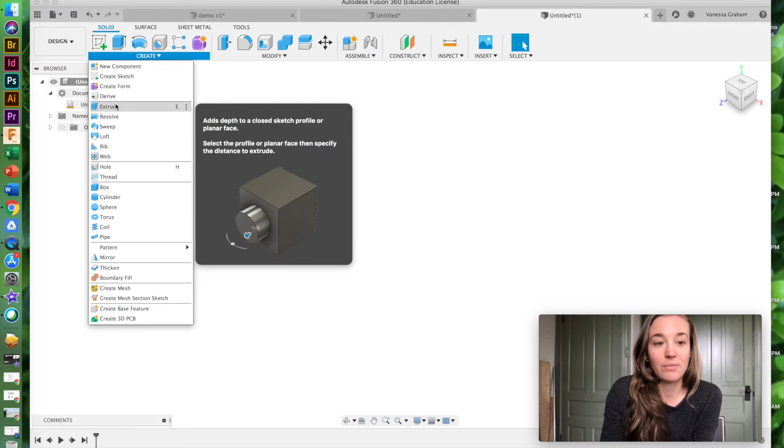With that being said, we're going to start. We're going to create a sketch rather than using one of our primitive shapes. We're going to create a sketch. Also, my shortcut is right there. Now I have to pick which plane I want to make a sketch on, and I'm going to be eventually modeling vertically, so one of these two planes, doesn't matter which one.

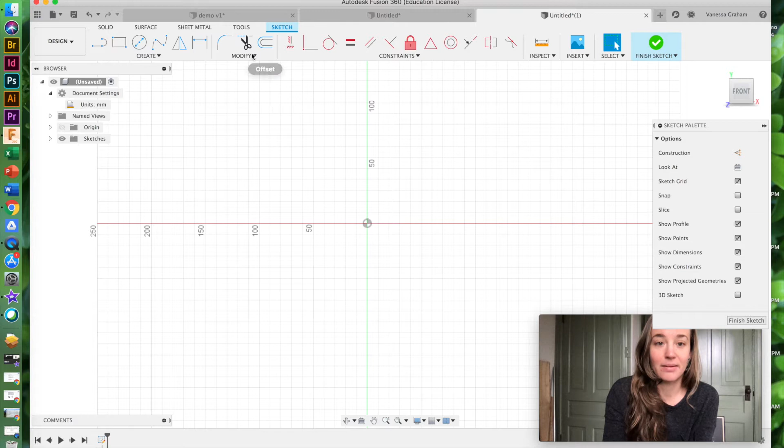And before I start my sketch, I want to go ahead and set my parameters. So for a model of a ring, we're just going to be setting two parameters. The first will be your ring size. So if you model this for yourself and then your mom wanted one, you could readjust your model for her size as well. So yeah, another benefit of parameters.

If you haven't already, go ahead and watch the little how-to video on how to determine your ring size. That is going to tell you what size finger you have, and then from that information we can find out what the diameter of that specific ring size is. So go ahead and watch that video, and then you'll be able to figure out what value you're putting in here.

I'm going to be putting in 17 just as kind of a guesstimate. I guess I can look real quick. Oh, wrong.

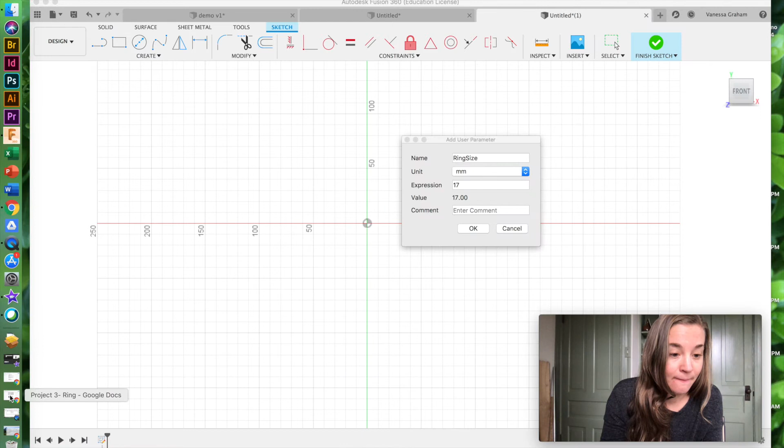If I am a size 7, that's 17.3. So I'm going to put 17.3 right there as my parameter value, that's my ring size. I'm also going to put in thickness, which refers to the thickness of my wall. In this model, it's how much it comes off your finger right there.

So I'll add in my thickness parameter by clicking this plus button. I'm going to name it thickness, and my expression will be based on this: I generally, especially if I'm printing these, want it to be between 1 and 2 millimeters. If you're printing in plastic, you want it a bit thicker for better quality print. So this will be my ring size plus whatever I want the thickness of my ring to be, so 1.7 millimeters.

So you can see that outer diameter circle right here is set in my parameters to be whatever my ring size is, plus 1.7. That way I always maintain that thickness.

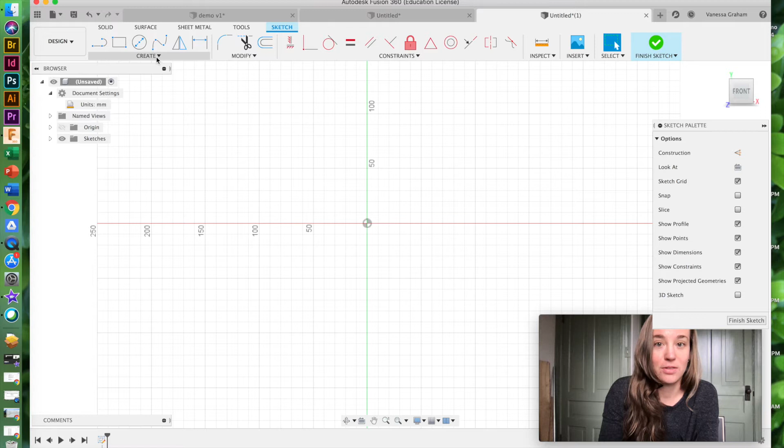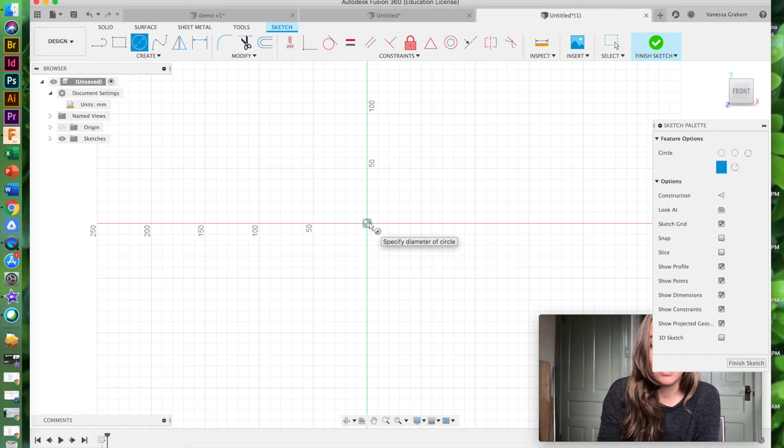So we're going to start with my interior diameter, which is my ring size. Oh, I didn't really mention what I'm doing here. Okay, undo. Didn't undo. There we go.

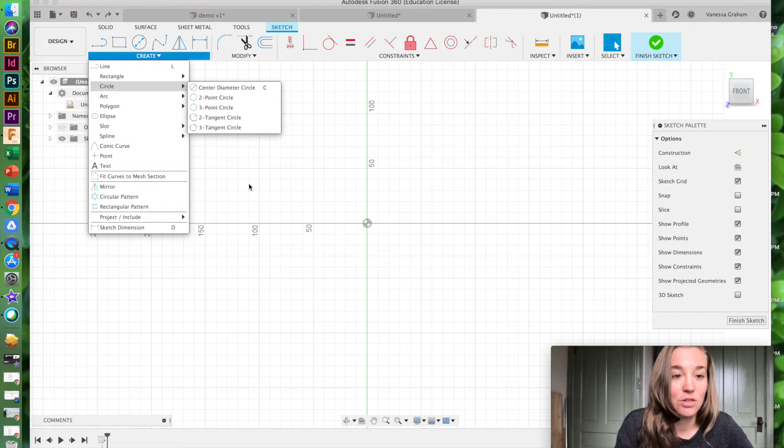So I'm going to go to my create menu up here and choose a circle. I have various types of circles. When working in my sketch environment, especially when modeling parametrically, it's best if I'm modeling directly off my origin point, so I can keep things aligned perfectly, especially if I'm sketching in multiple planes.

So I'm going to choose a center diameter circle, choose the origin as my center point, drag out, and then I could type in my ring size right there, but I want to set it to my parameter, ring size. Oh sorry, my computer fan's turned on again.

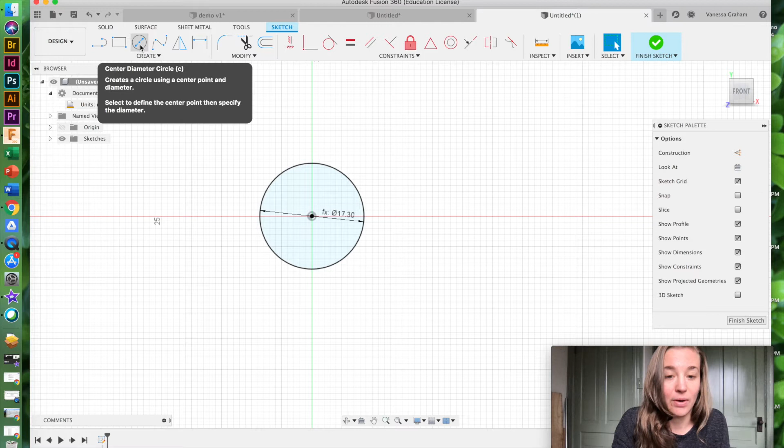Okay, and then I'm going to repeat that process, center diameter circle, which my shortcut is right up there for center diameter circle. Again, starting at my origin, dragging out, and there I wanted to type in my thickness. So now I have the sketch for this line and that outer diameter as well.

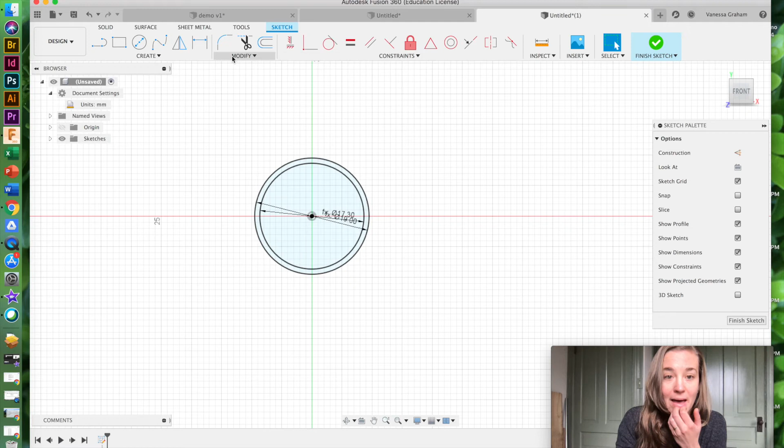Just to show you how parameters work, if I decided my ring size is bigger, like 17.3, you can see that it's completely adjusted my model for me. So again, super helpful. What was it? 17.1? Okay.

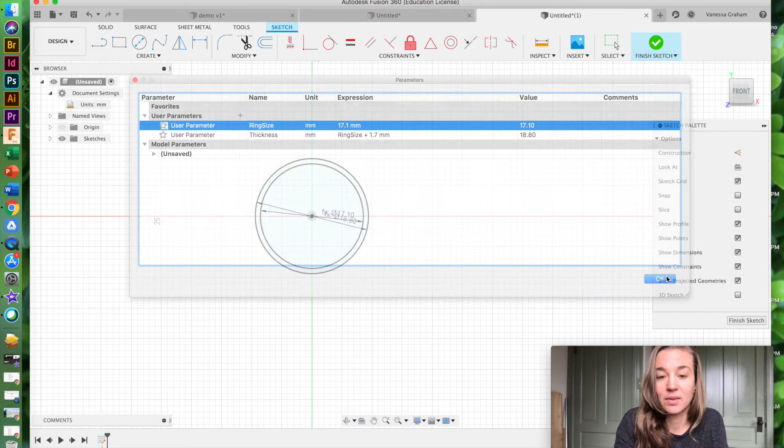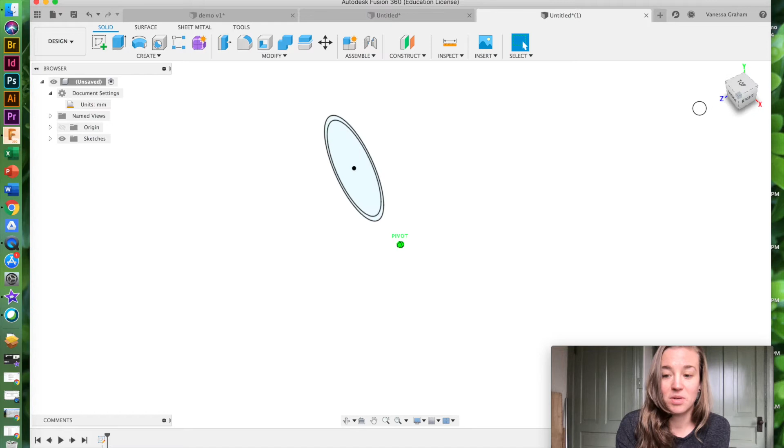So we're going to stop the sketch to exit out of my sketch environment by hitting that check mark, finish sketch, and now I'm back in my modeling environment. So this is what you're used to, all these tools up here, and you can see I have a flat two-dimensional sketch. So from the sketch I can make a three-dimensional object, make this ring.

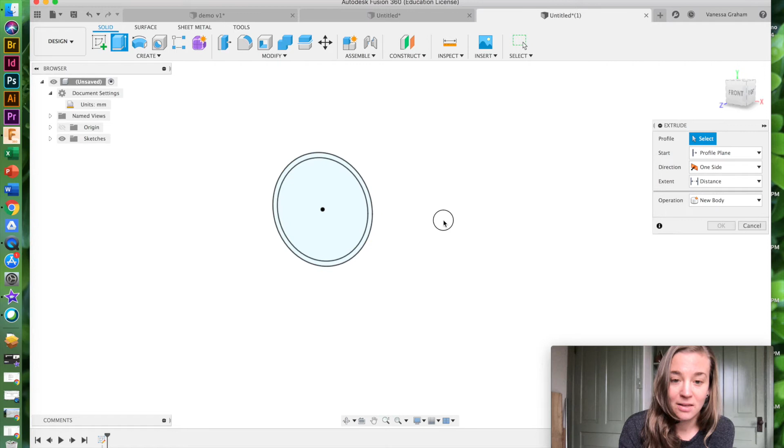By using my extrude command. Extrude will just add depth to a plane or a face, which is what this is. So I want to select the ring, not the interior, but that little section, and then I can go ahead and pull it out and extrude it as wide as I want my ring to be.

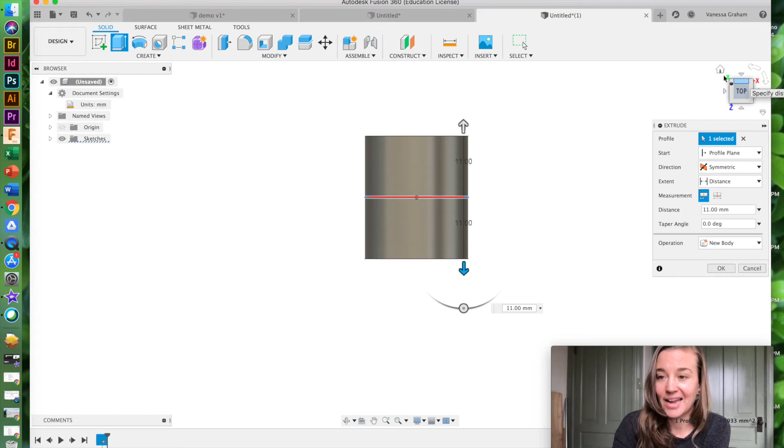Right now it's set to extrude in one direction. I'm going to change that to symmetrically so it stays lined up on that axis perfectly instead of jutting off to one side only. Right now it's extruding 11 millimeters in both directions, which is pretty extreme. I'm going to do 3 in both directions, which creates a 6mm wide ring, which is still fairly wide.

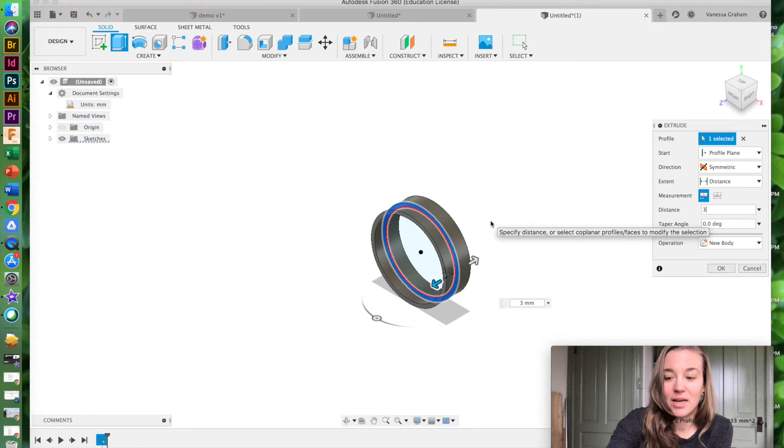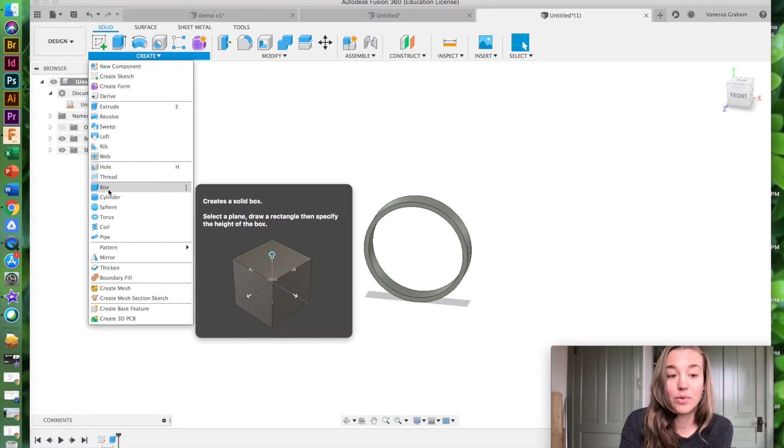That's kind of more of a men's size. If I wanted to do a thinner woman's ring, like 3mm, I could type in 1.5. Okay, so there I have my ring. From here, I can do a whole variety of different things. If I wanted to, I could really just continue using my primitive geometries, adding boxes, cylinders, spheres.

But I want to show you a couple more things in my sketch environment. So I can always edit the sketch if I want to, right-clicking, edit sketch. You will also notice I have a new folder right there, sketches. So as I create multiple sketches, they'll populate in the sketch folder.

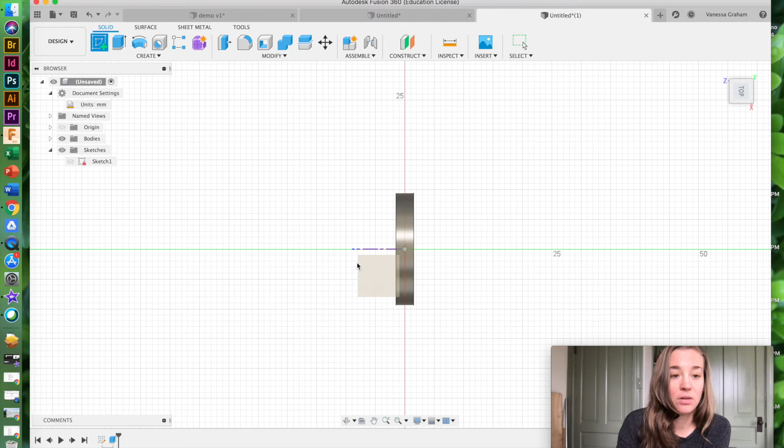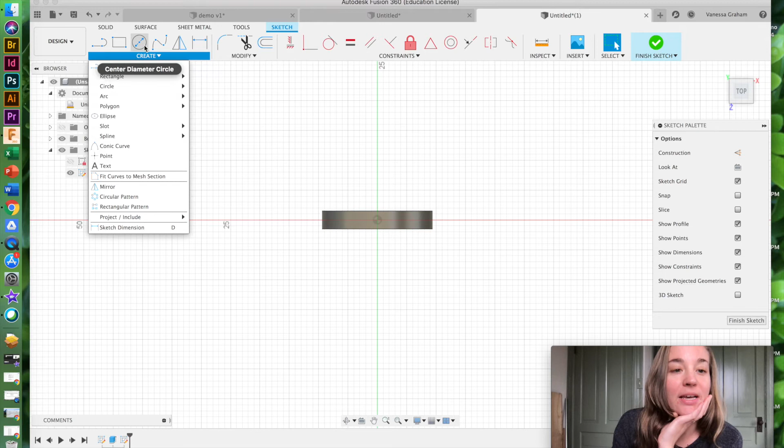I'm going to go ahead and create a new sketch and do it from my top view because I'm kind of wanting to create something to put on top of this. Actually, yeah. Okay, I'll show you a couple other tools we have in our create menu. So far we sketched a circle, but we also have the option to sketch rectangles. We can do arcs. We can do ellipses. Maybe I'll do an ellipse.

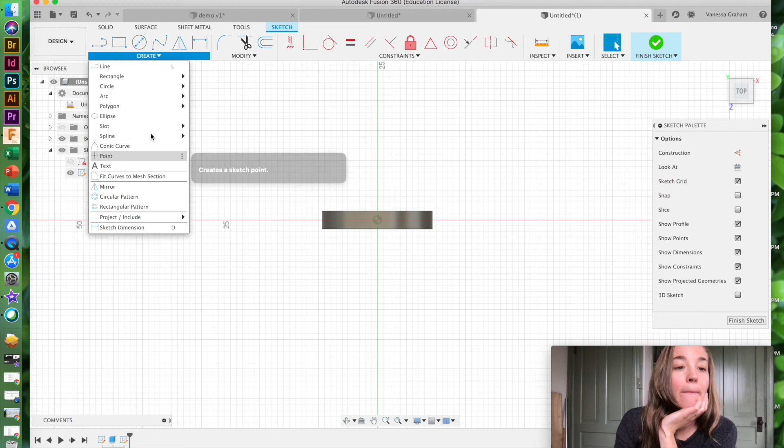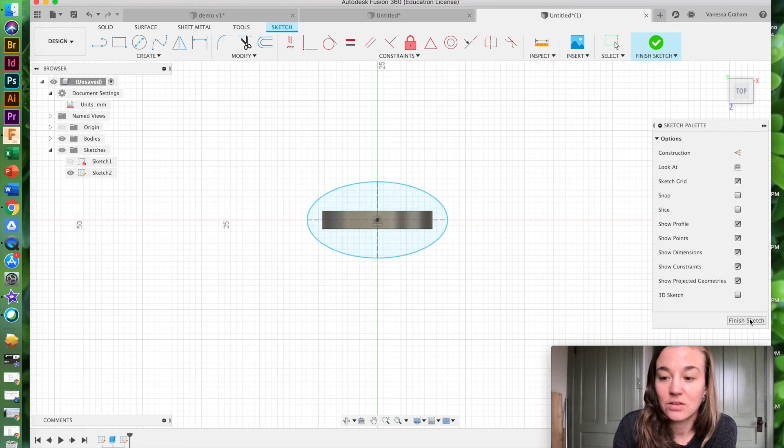A spline will let me create a more curved line, as you can see right there. Let's do an ellipse. Center point. Drag out, and now I can kind of create, you can see this in the video, but this is kind of the top-down view. So this is going to be kind of what I want it to look like. So it's kind of a giant, big old thing on the top of your finger. This is a larger ring. Let's just say finish sketch.

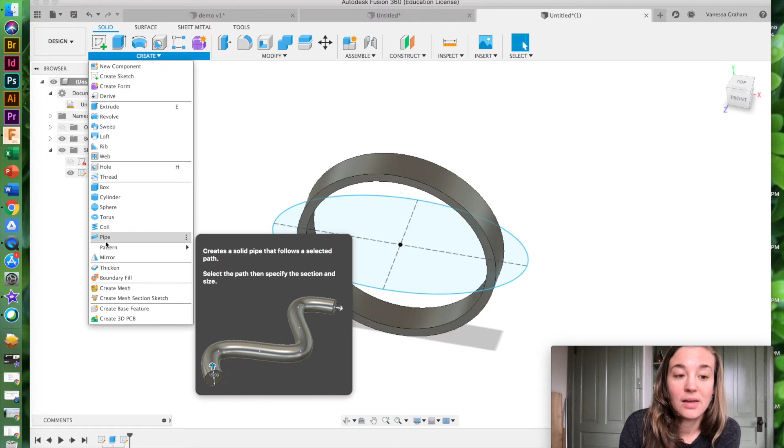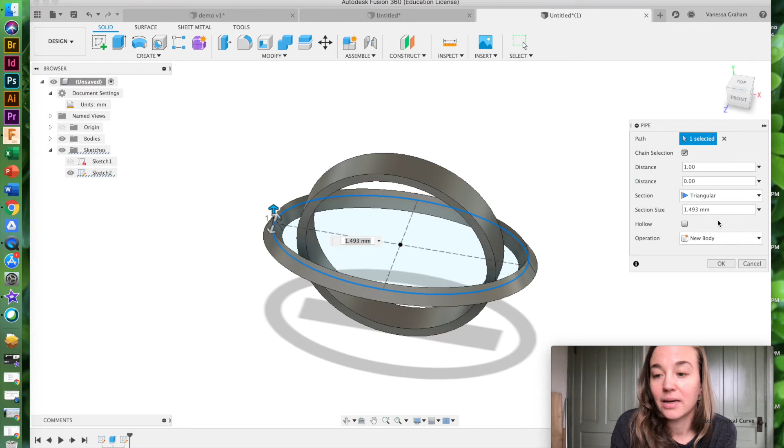So that is within my midpoint line, and I have a couple options here. I didn't really show you guys how to use the pipe tool, but this is a really good point to use it because it follows a path, and this sketch line I've created is a path. So if I wanted to create a pipe around that ellipse, I could do that, and I can create a triangular type of a pipe or square pipe, whatever I really want to.

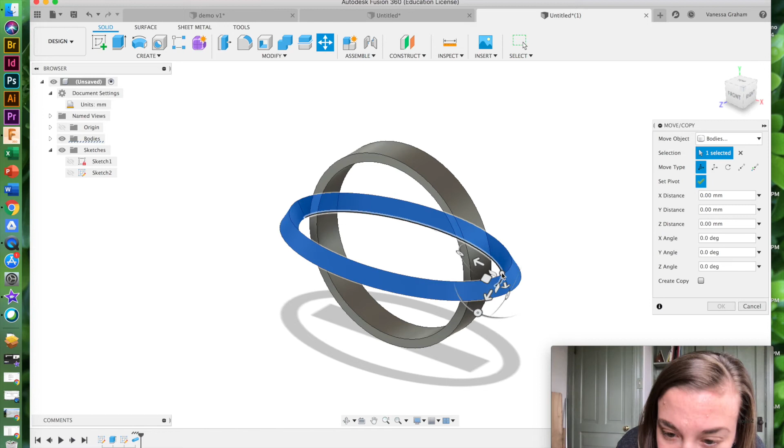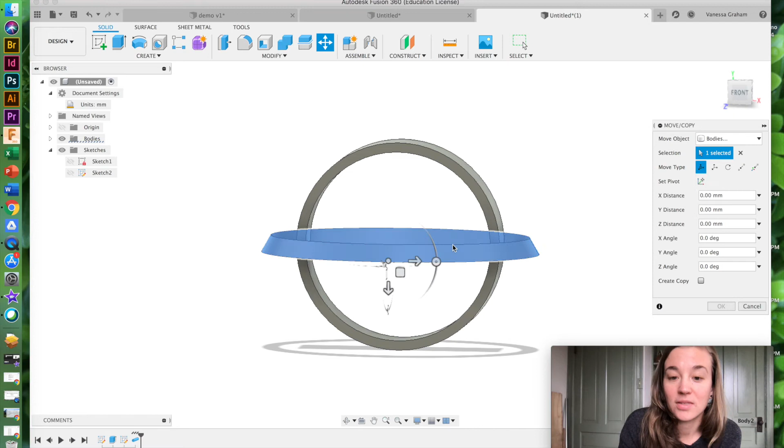I'll move this, but I do want to make sure my pivot is set in a location where I can pull it straight up and down. What if I put it on the bottom? See where that is. Yes, okay. When I move my pivot, I need to hit this green arrow or check mark to set it. Now I can pull that straight up, so it's going to be something that's sitting on the top of my ring. Hit OK. You can notice my sketch is turned off, but it's still there, so I can still do something with it.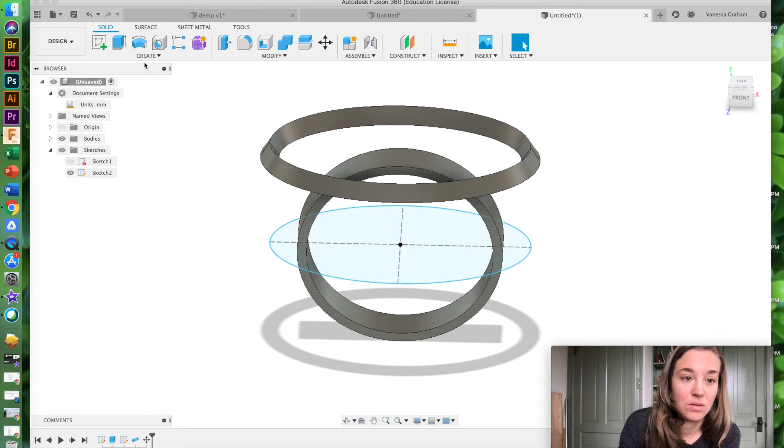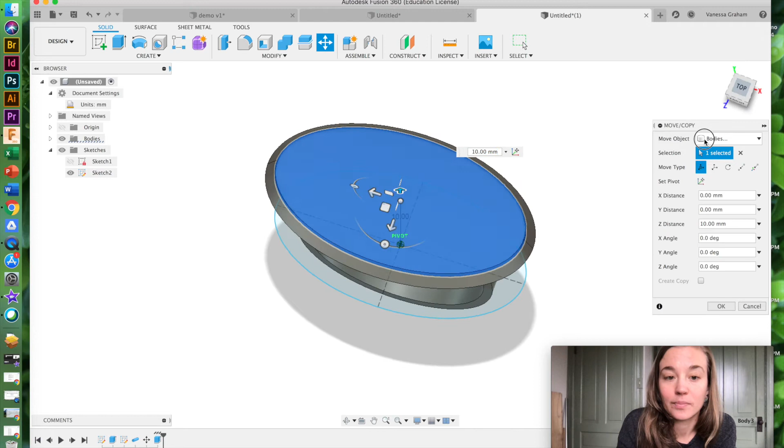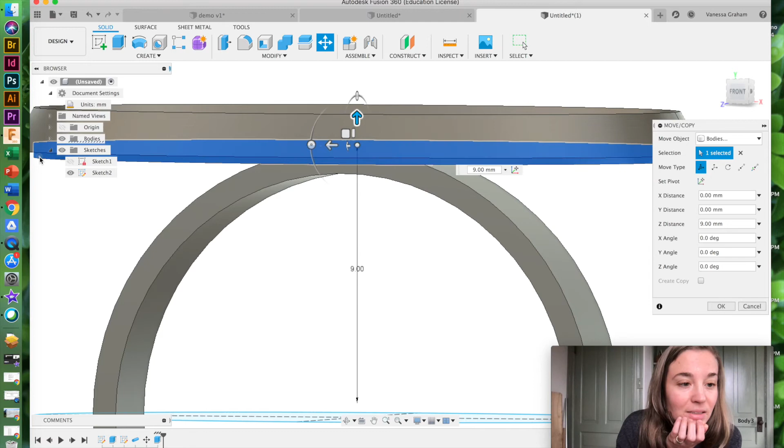If I wanted to make kind of a flat base for this pipe, I can extrude my sketch again. Right now it's set to cut, but I can make a new body with it. Maybe something thinner, 1/2 millimeter. And then I can move that up as well, to kind of fit within there. It's gonna bother me that it doesn't reach this exterior edge right there. Let's see, first I would like it to line up with the bottom. You can see it's overhanging a bit. My zoom isn't working. There it goes. So what's 9.5? What's 9.2? That's good. Okay. I guess it fits right in there. Yeah, okay, I'm happy with that.

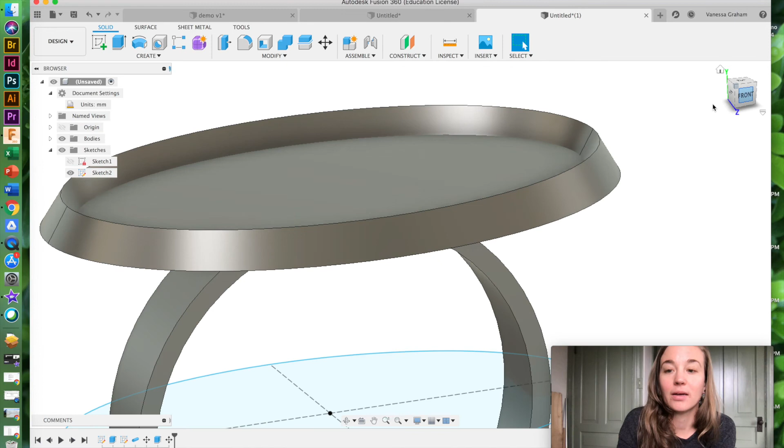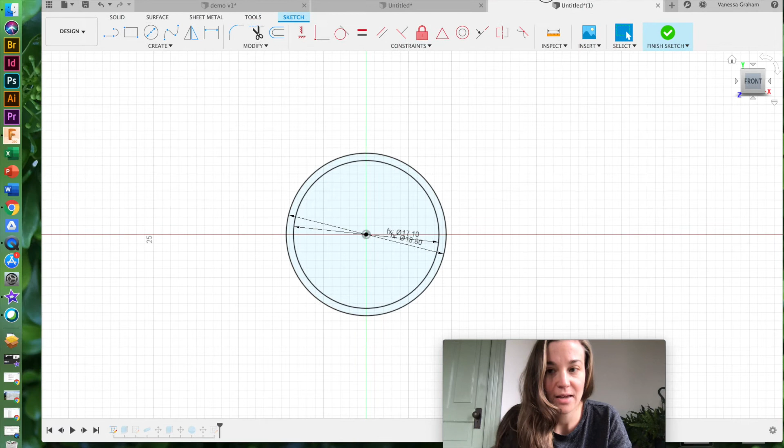So that previous section was all just about how to make a plain normal ring with stuff added on top, but I can also make a ring that is not your typical, it's not the consistent thickness the whole way around the way that this one is. So I want to show you how to do that. I went back in my first initial sketch right there, right clicked, and now I'm editing that.

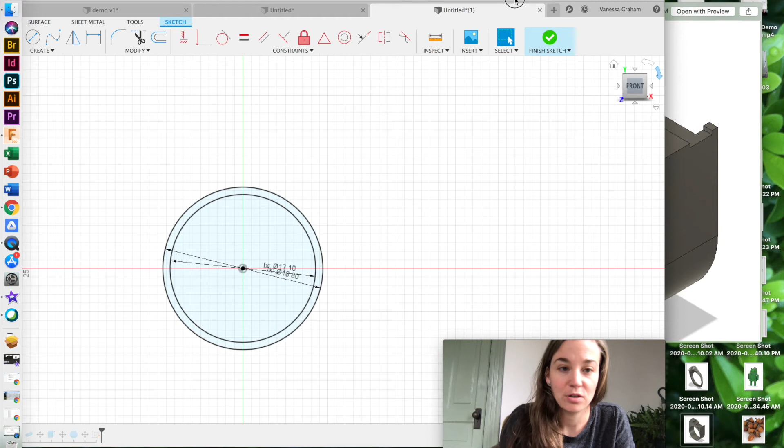So if I wanted to make a ring like that big boxy one I just showed you guys, I actually want to change my sketch to include this other space around here. So in order to do that, I am going to use my line tool and just draw a line up from this central origin point to the edge of my ring, and go ahead and, I don't know, pull it up that high maybe.

Just gonna do that side and then the same thing to the other side, and one straight across. Anytime I close in a geometry and it closes in a sketch, it will fill in blue like this. So I need to make sure whatever I'm doing is filled in blue. Otherwise, when I try to extrude it, it's not a closed form, so it won't be able to extrude. So I do need something like that.

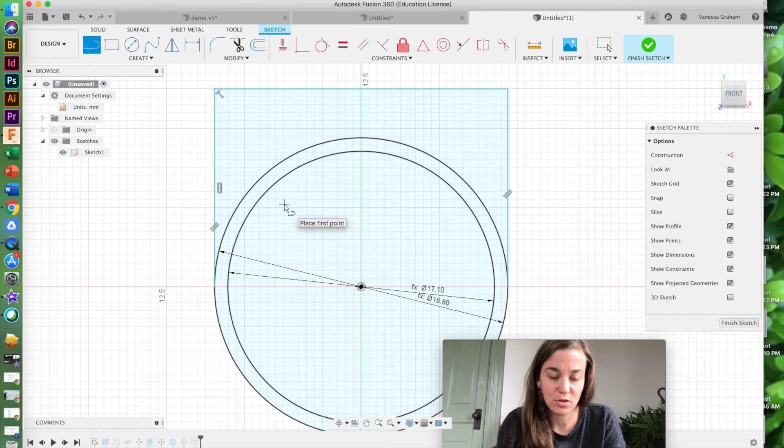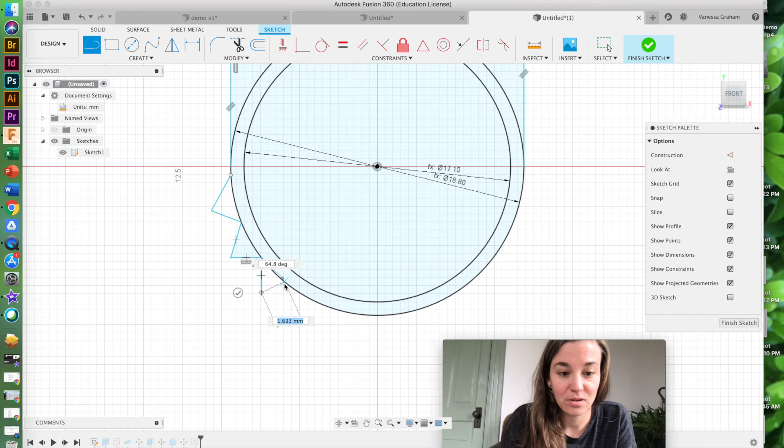Also, if I wanted a band that wasn't straight-sided, I could add on some little... this maybe wouldn't be the most comfortable ring if I am having spikes all over it. Looks like that first one I didn't actually close off all the way. I'll fix that in a minute. Maybe I'll just do a couple so you don't have to watch me do a bunch.

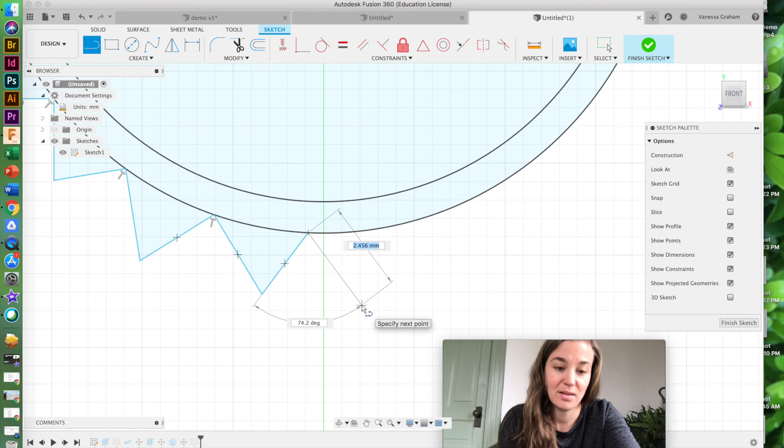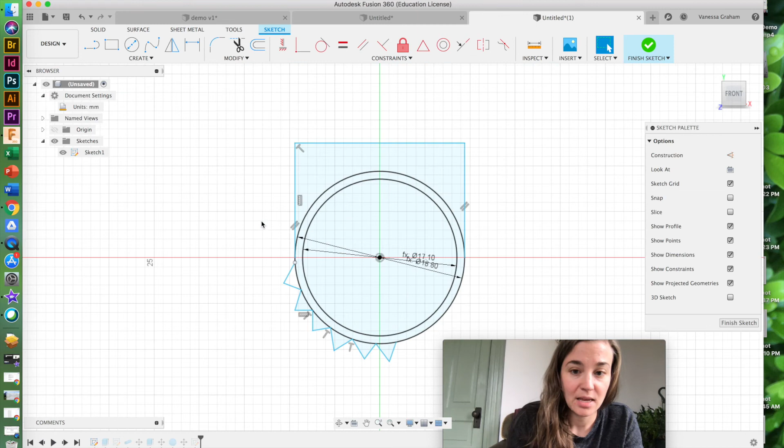I could be much more precise about this than how I am being. It is telling me the length of my line and the angle at which I am placing my line. So if I wanted to do this a little more perfectly, I could pay attention to that. And I want to get out of my line tool. So in order to get out of your line tool, I'm actually going to hit my escape key. And now I should be able to grab this singular point, and there it goes. It just wasn't on that exterior rim right there.

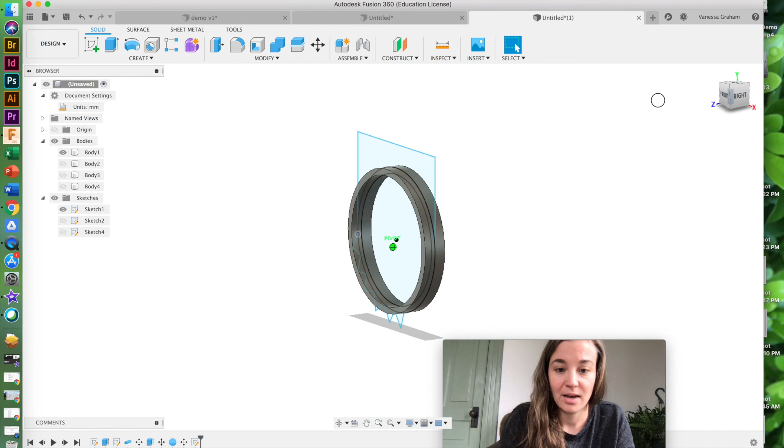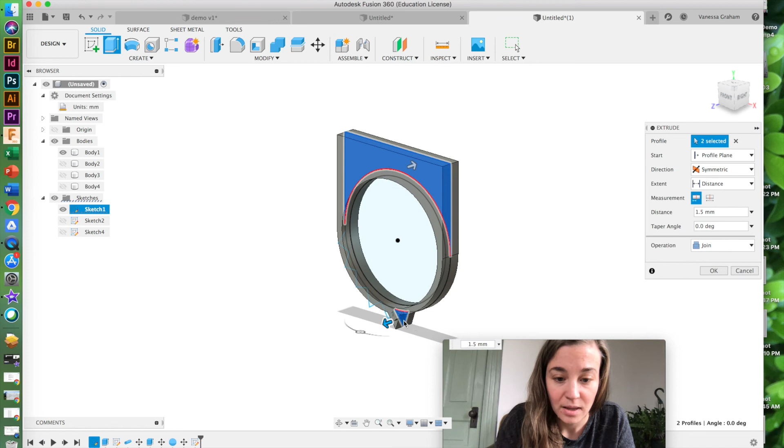So let's go ahead and finish sketch and turn that sketch back on. So now I can also extrude these other sections symmetrically. Whoops, what did I do? 1.5 for previously. So that's kind of a similar shape that I have going on in that other ring. And I could also extrude these little guys as well. Maybe again, better for the top of your ring instead of the part going in between your fingers.

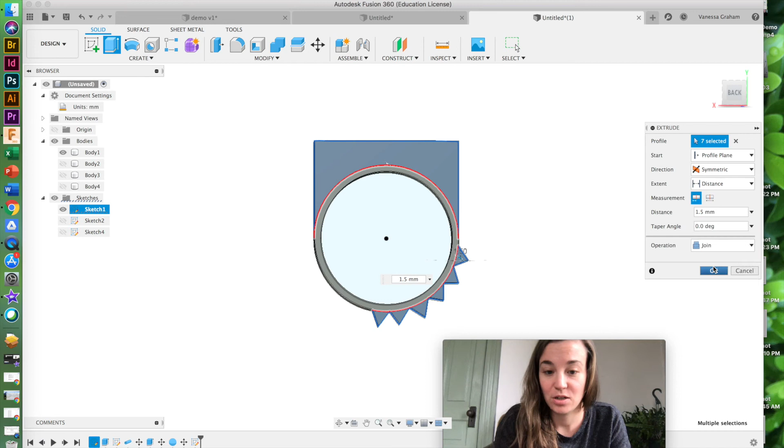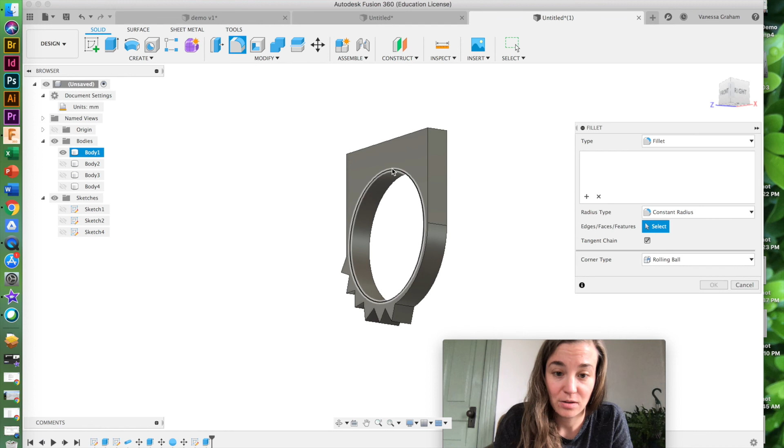I could join it so it becomes all one body now if I want to. I could create a new body if I want to. I'm just gonna join for now. And I have a shape like that. Let me turn my sketch off again. So there's my new ring body, and I can leave it like that, or I can continue to alter it. So I can use my regular tools. I could add a fillet to that corner if I wanted it to be a little bit rounded, more comfortable for actually wearing.

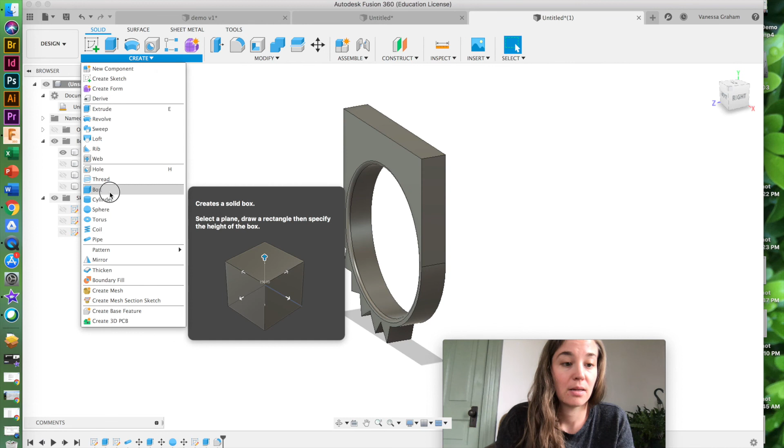I can also use some of my primitives. Oops, I don't want to do that. And like for the other ring I was showing you, I actually drew a box on this top plane and this side plane. So now I have the option to add my primitives to any of these surfaces. I don't only have to choose these central three. So I could choose this top plane of my ring,

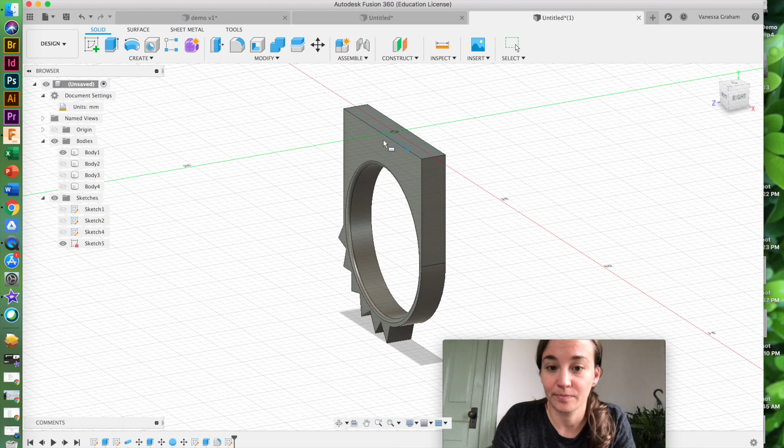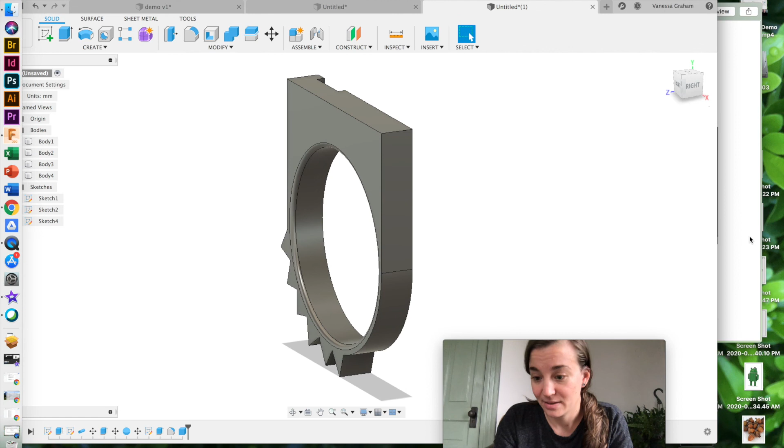and draw a box up here where I could add it on, or I could pop it down in, which will automatically be set to cut. So cut a little section out there. I could just repeat that and repeat that. Some positive forms, some cuts in, which is how I made this ring. I can also continue to create bodies with my sketches, like that guy.

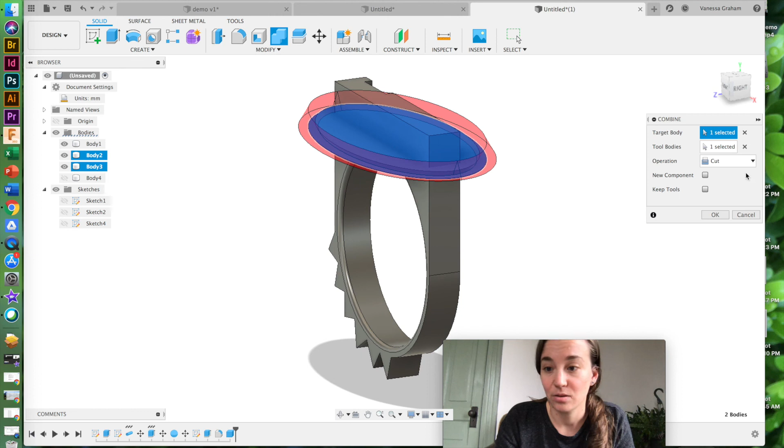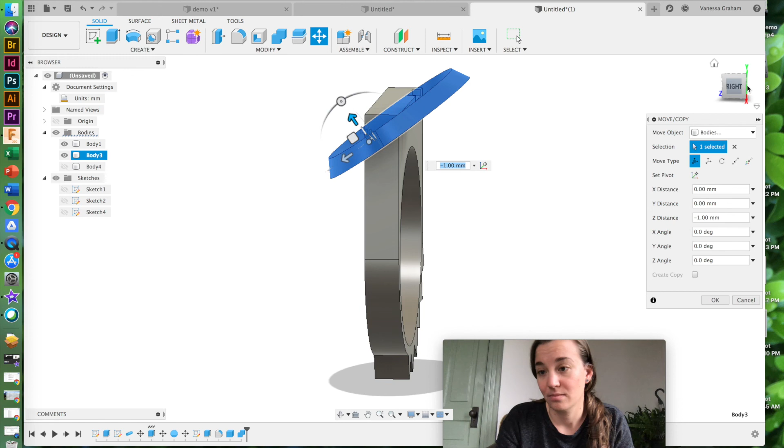And let's see, let me combine those two into one. Move this body up here. I can rotate it and have them intersect at an angle if I want to. This is not the most interesting. This is a weird ring. I would probably try to have a little bit more cohesiveness if this was an actual ring I wanted to make, instead of just random parts thrown together.

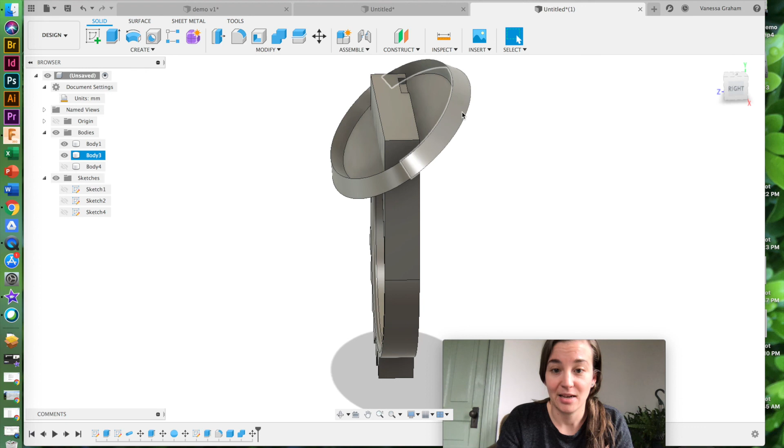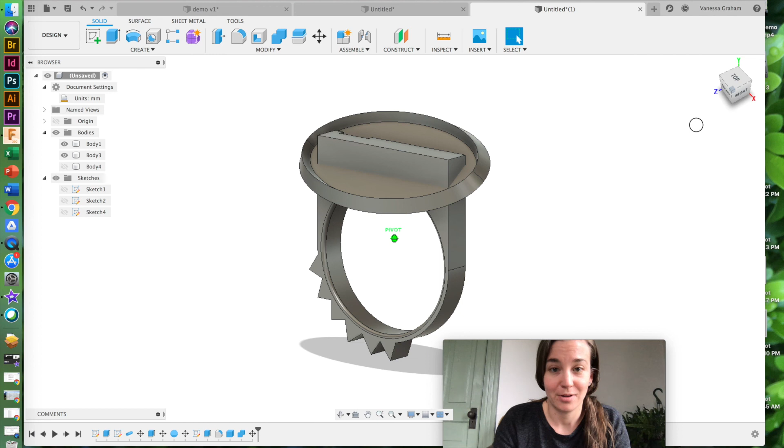But yeah, I did want to show you that there's multiple ways to create bodies. I can continue sketching and extruding to create bodies that way, or I can use my primitives if you feel more comfortable with that. But yep, I can do that to create a geometric ring. So that's kind of the sketch process, very briefly touching on the very basics of sketching. Sketching does get much more complicated and precise as we move into 3D printing to model very specific things, but this is kind of a playful introduction to it. So yeah, mess around, explore, be creative, find ways to build forms for your geometric ring.